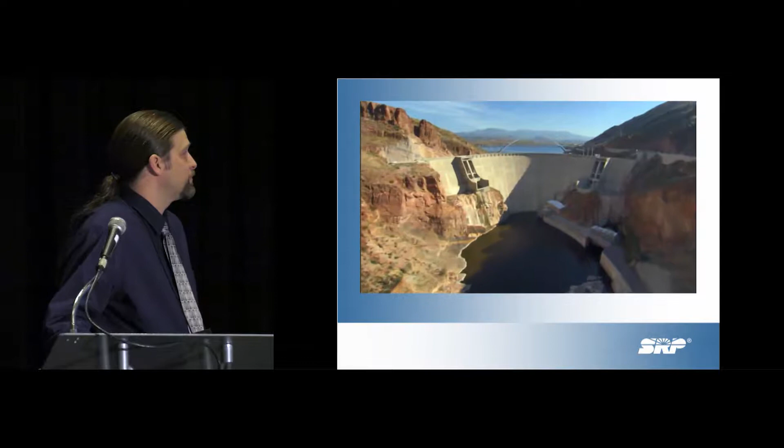Meeting the needs of our electric customers and water shareholders is always the right idea at SRP. For more than a century, we have been dedicated to providing reliable, reasonably priced water and power services to meet the needs of people, businesses, and communities in Arizona. As one of the nation's largest public power utilities, we provide generation, transmission, and distribution services to about 930,000 homes and businesses in our service area.

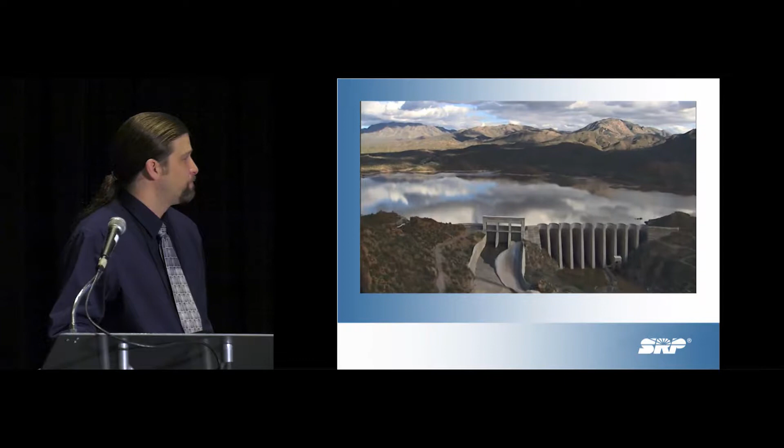We also are the largest water supplier in the Greater Phoenix metropolitan area, with a service area covering more than 375 square miles and management responsibilities for a 13,000 square mile watershed. SRP is a leader in the community, anticipating, planning, and implementing strategies that make the most of Arizona's precious resources, meeting the needs of our power customers and water shareholders now and in the future.

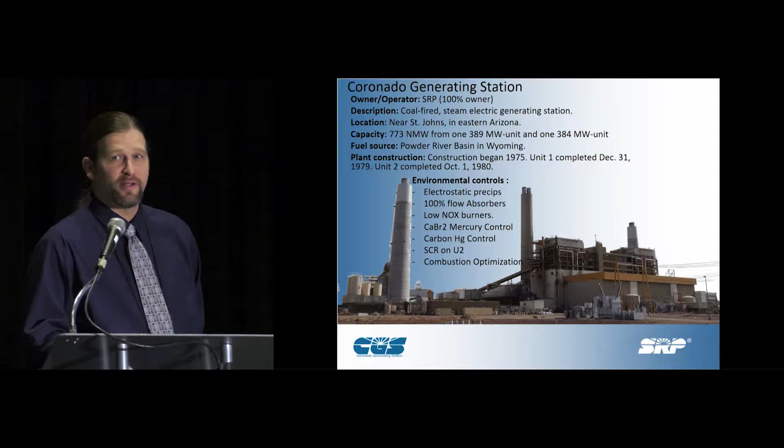All right, so that's who we are as a company. What we're going to talk about today is Coronado Generating Station, our operator training simulator, among other types of simulation. We're actually a coal-fired plant, and we've added on through the years probably every type of environmental control that's commercially available.

Historically, our control room operator training was just a 2-week classroom. We had 18 JPMs that were performed in the field. The unfortunate thing about that is you have a job performance measure, which is a good thing to do. However, those events didn't always happen, thankfully. So usually we did it with thought experiments and just talking through events. And then they had to be upgraded on the units for 80 hours before they were turned loose.

About 2009 is when we started working on the simulator. We actually had it installed by 2011. It was included as part of a DCS migration project. We went from a TDC 3000 to an IA system. We justified the simulator that way in that we knew we had several things happening. We were losing 90% of our workforce to retirements. Also, just having new controls pushed it forward.

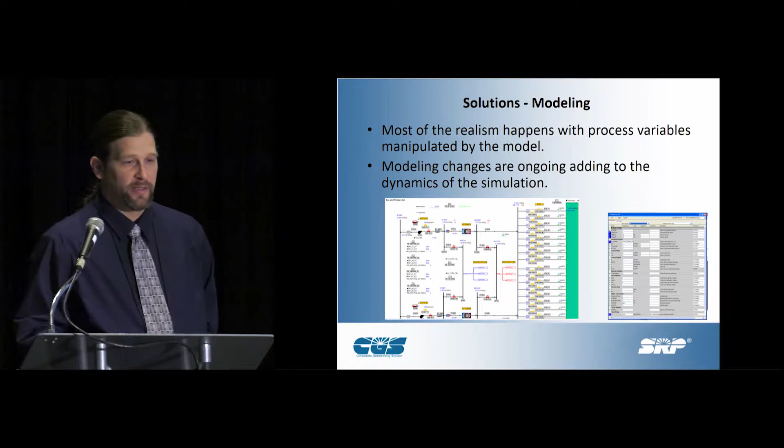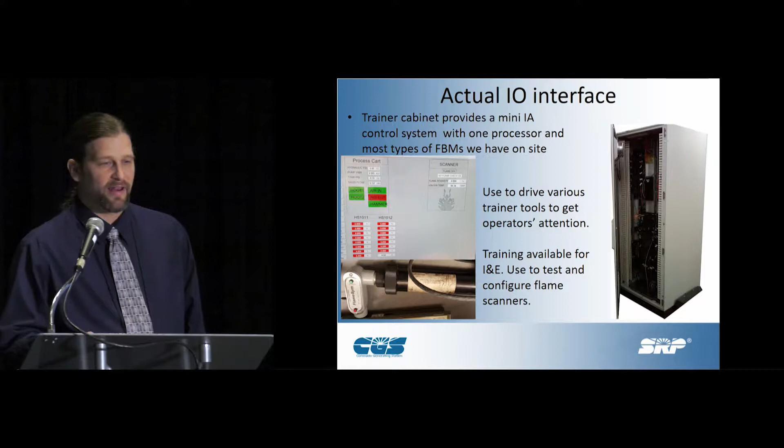So with simulation, as Rick mentioned, most of the realism happens with the process variables that are manipulated by a model, which is just a mathematical representation of the unit, of course done with a nice pretty little GUI. We added a little bit more to ours. We mimicked our control room environment, so it looks like a control room. Same type of console, same number of screens, everything. We also added an actual I/O interface so that we could do some maintenance training and configure our scanners, that kind of thing. Also, just to have fun with.

The thing that I started recognizing as newer and younger people started coming in and training was that they started treating it like a video game. And it is kind of like a video game. At the core of it, it's the same technology. So I needed a way to basically scare the hell out of them and make them take it seriously.

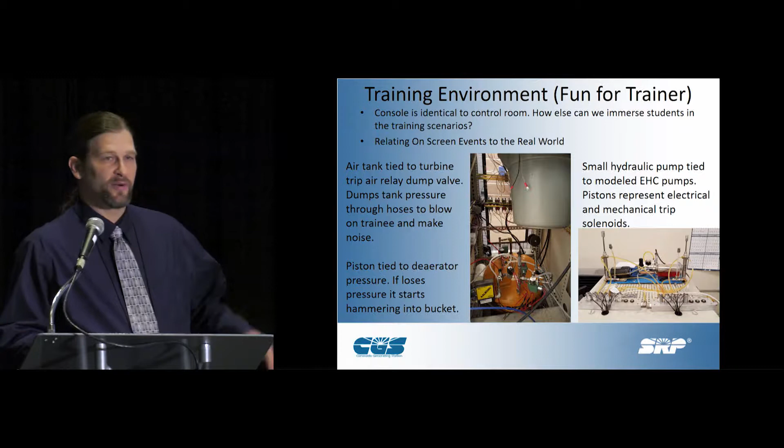So this was just a fun little project that we did, a little air tank that ties in. If they trip the unit, the air releases. Also, if they get into issues like with our deaerator and lose pressure, it'll slam that little piston into that bucket, and it's just fun and fireworks.

So during our migration, we did 4 days of training for existing supervisors and operations specialists. Our claim to fame there was we had no startup delays due to operator error and no startup delays due to DCS logic, which was our side benefit. We found multiple control issues that we thought were found during the FAT, where when we actually connected them to a high fidelity model, we found that we weren't nearly as robust as we thought we were. We found upwards of 200 control errors that would have bit us had we not done it.

Currently, our OST training program, that's Operations Specialist Trainee is what it stands for, people trained to be control room operators. We have a 120-hour Operations Specialist school. We actually do it with the simulator, so we do a little bit of classroom, and then we actually have them demonstrate on the simulation. The CBTs that we have them do during the training just kind of keep us on track. And it's a 6-week program.

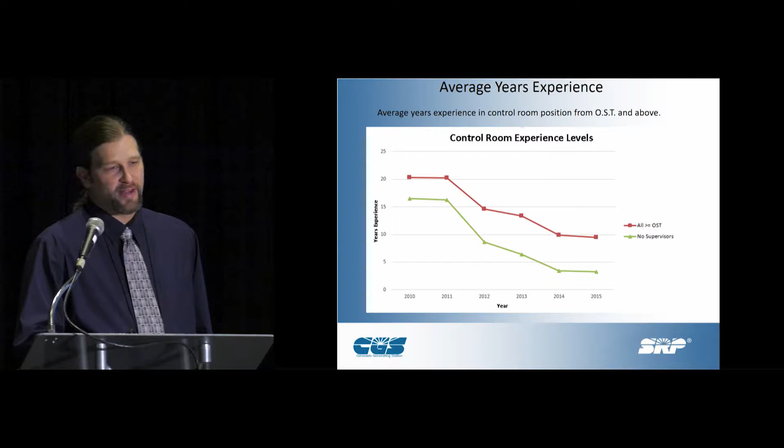So this is what we were facing, and this is actually information from 2015. It's gotten worse since. Our average years of experience in the control room went very quickly from about 16 to 18 years down to, currently, this actually went down even further. This is from last year. We're down under 2 years of average experience in our control room currently.

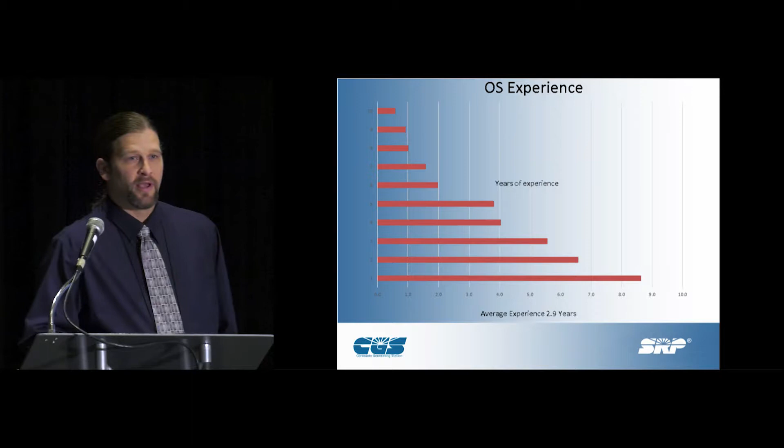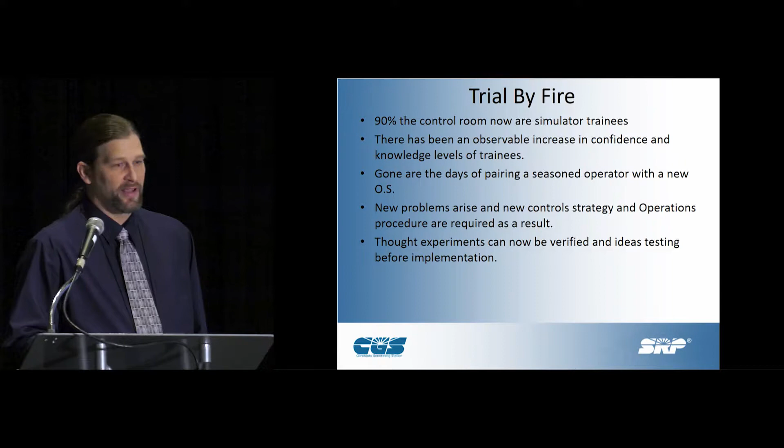So that's a trial by fire, right? So this simulation is going to work. We're going to be able to train these guys on how to drive these units, or we're going to fail spectacularly. Luckily for us, now 90% of our control room did actually come through the simulation program. There has been an observable increase in knowledge and confidence compared to previous trainees and what we're seeing today.

It always was in the past that we could take a new operator, pair them with a seasoned operator, so they could lean on him and he could teach them as events or excursions came up. Those days are gone. We don't have those people anymore that can do that. Also, as the market changes and things in our industry are changing with our loading profiles, new problems start arising. So another thing we've seen from the simulation is finding ways to mitigate those problems.

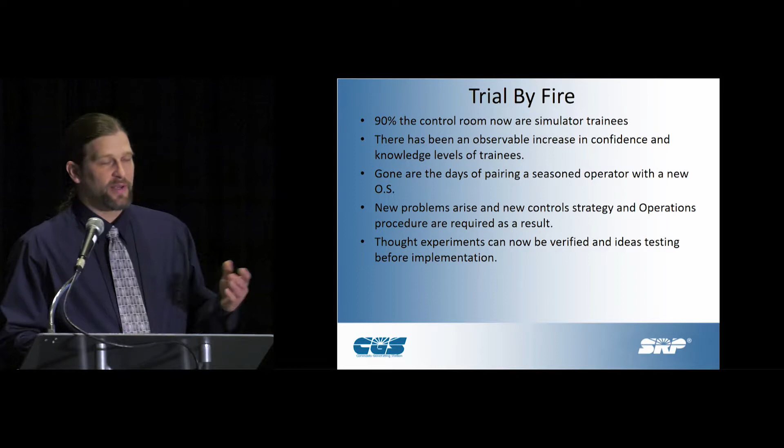And this is basically the fear that we were facing at the time. If you could play this.

Huh? Noise! Bad noise! 5 minutes before critical mass. Critical what? Okay, don't panic. Whatever problem this is, I'm sure they know how to handle it. Oh? It's my problem! We're doomed! Sector 7G is now being isolated. Mr. Burns, people are calling this a meltdown. Oh, meltdown. It's one of those annoying buzzwords. We prefer to call it an unrequested fission surplus. Homie, please be all right. Gotta think. Okay, somewhere there's a thingy that tells you how to work this stuff. The manual. The manual, right. It's as bad as a phone book. Congratulations on your purchase of a Fissionator 1952 slow fission reactor. Don't get to the point, man! Woo, what's this? Don't! Who'd have thought a nuclear reactor would be so complicated?

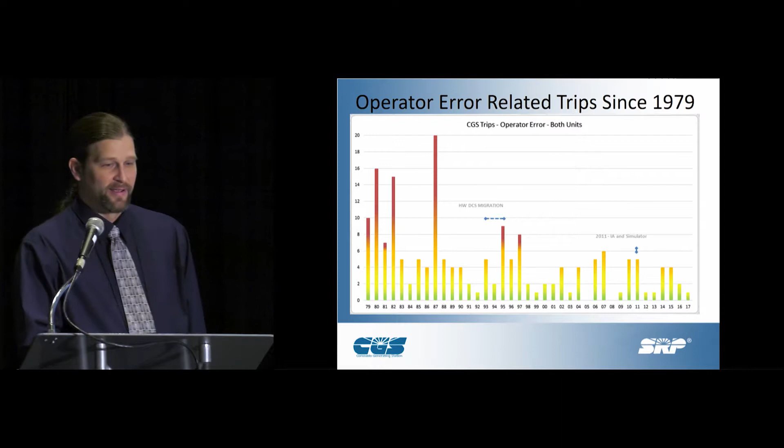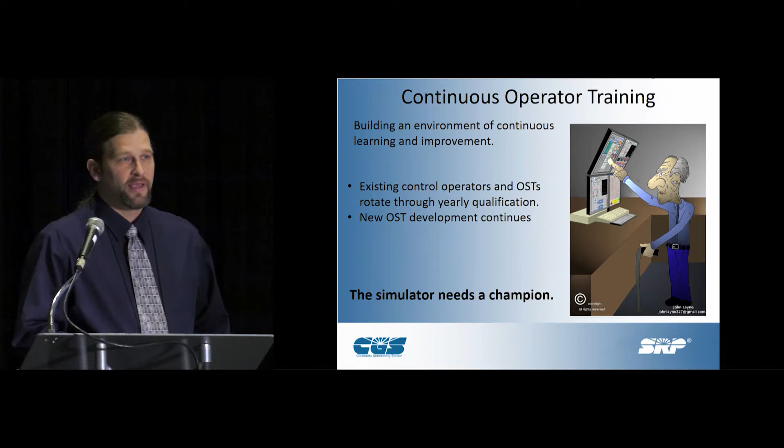So a lot of getting that is not only the initial training, it's also trying to build an environment where we have continuous training. So anything that happens on our units, any operator error, any process differences that we need to teach people on, we always rotate them through and test things on the simulation. It's always available 24/7, so an operator, when he's going into an unknown event or he knows something's coming up, can go back and test and try it on the simulator itself.

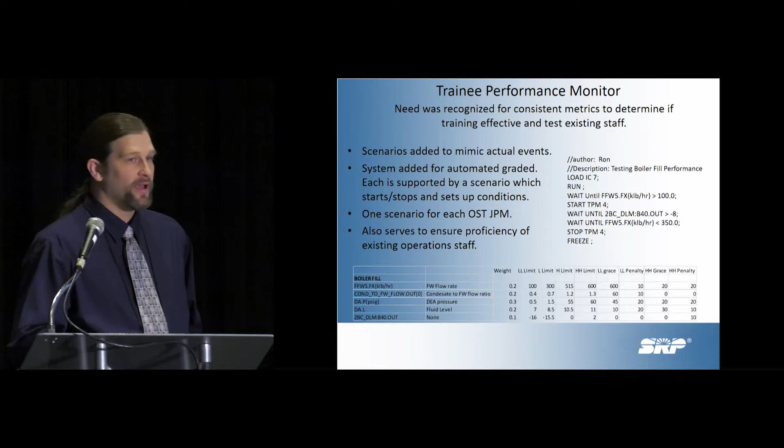Along with that, one thing that happened was a corporate goal. In the fossil industry, we're not required to vet our operators. They don't have to qualify. It's really up to us when we say that they're ready. But we wanted to do a little bit better and actually make our operators go through a yearly qualification.

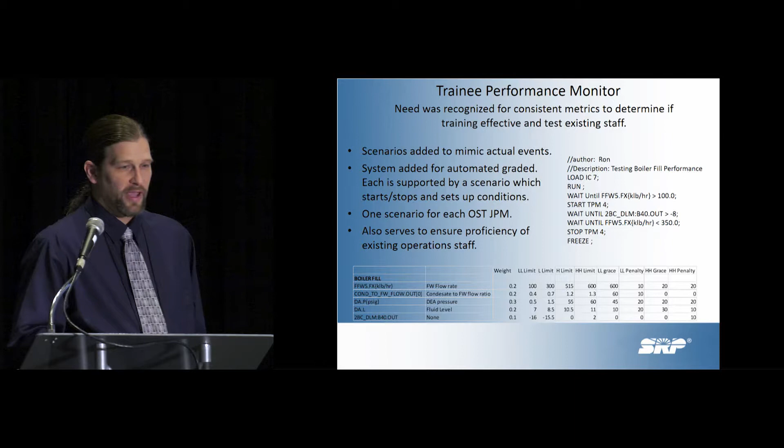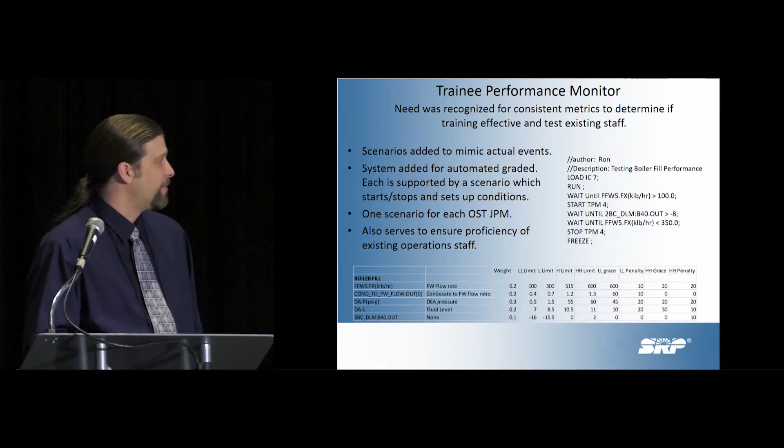And this is essentially how we did that, with a trainee performance monitor. This way it's empirical. It's not just up to the instructor. It's actually graded based on algorithms monitoring certain parameters.

So this is essentially what we do. We take them from a cold metal, from the very bottom, and have them work up. It works through 11 tests as they bring the unit up.

One of our big challenges when you're trying to build an automated grading system is there's so many different things that can happen when you're dealing with upwards of 12,000 I/O points. You don't want to make it so hard that nobody's going to pass, but you also don't want to make it so easy that they're just cruising through it.

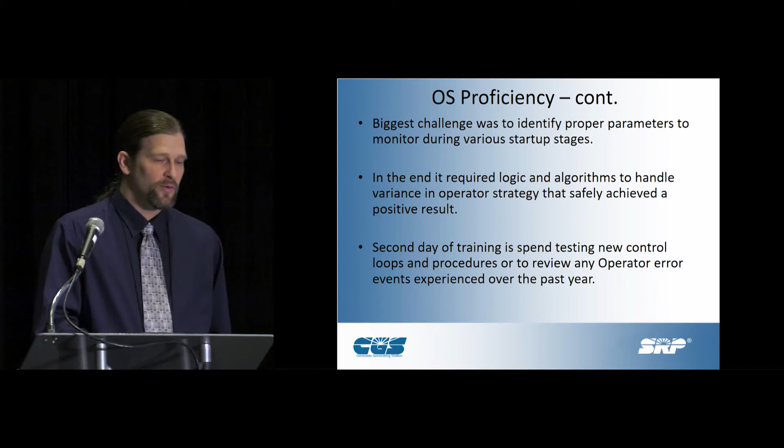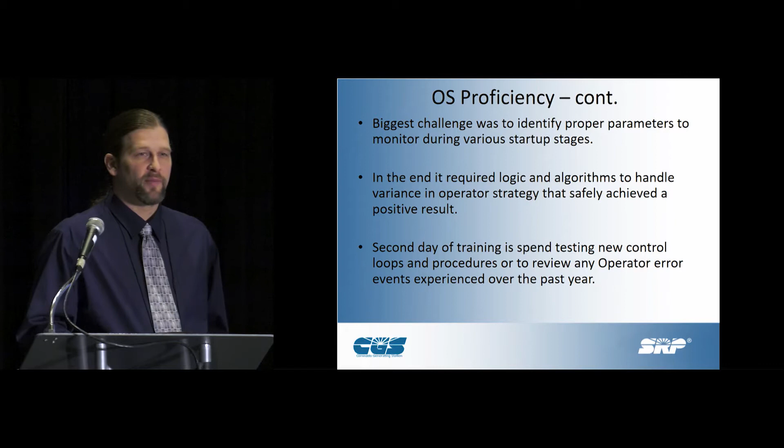So I thought this was interesting. I had to throw this in because being from a younger generation, I was always faced with, you're this young guy, you don't have all this experience, what could you know? So one of the interesting things, as we started going through yearly qualifiers, I found that experience did not mean that people were going to do better on grading. And it's not just because they're sitting in front of a computer and they're not used to it. Experience actually isn't everything in this.

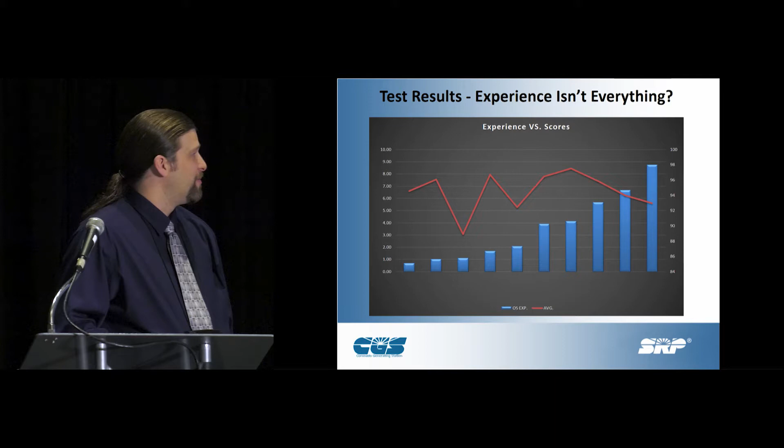A lot of it is the quality of training, obviously, but also how much the person takes it seriously and how much they're willing to learn. So we've got years of experience on a bar there. The red is actually the average scores, and they start tailing off towards the end. Now, to be fair, some of the older guys are not as nervous about it as others because they know we're not going to kick them out if they don't do great on the tests.

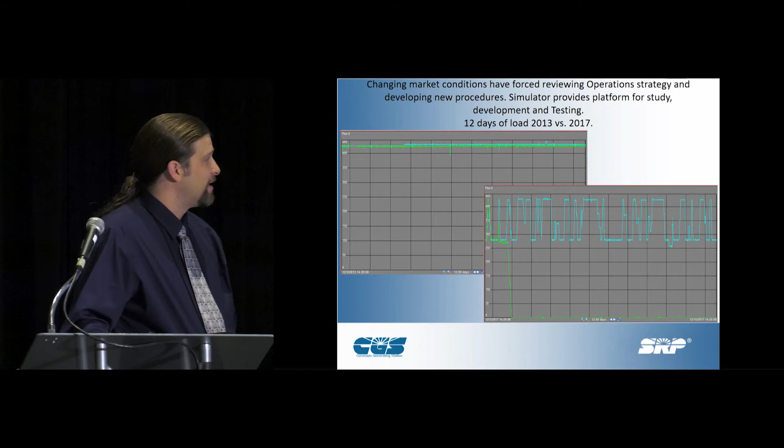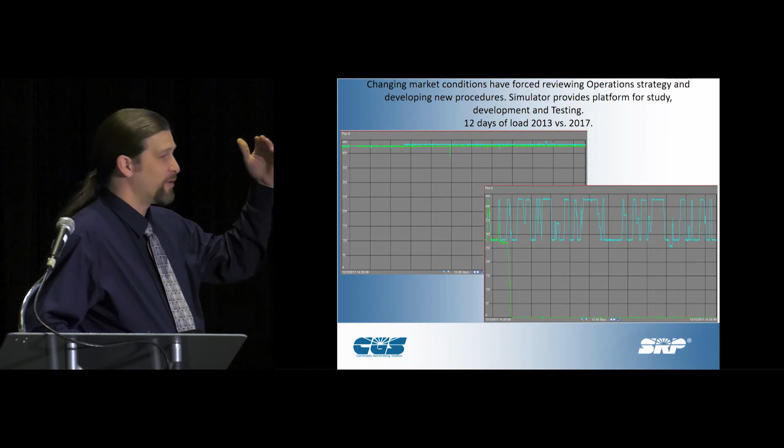Something that's happened very recently, a new challenge that we're facing, is something the simulation has really been paying dividends for us. These are our load profiles. We have 2 units there. So this is 12 days of load, 2013 versus 2017. 2013 is 12 days in December. That trend on the top, we were base loaded constantly.

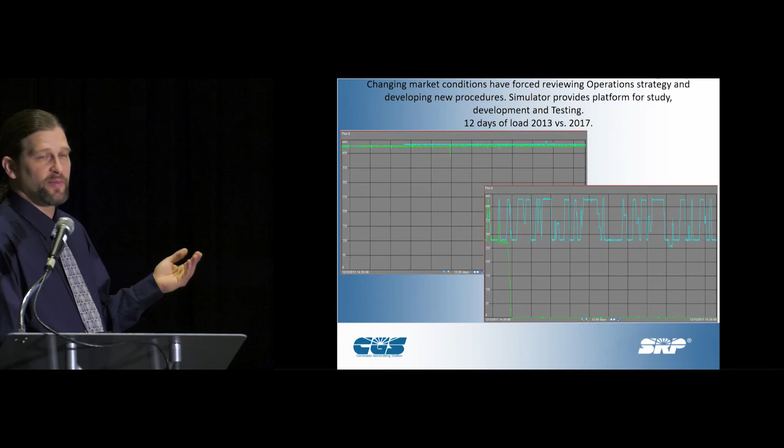So basically we would bring these units up, take them to as much load as we could possibly produce, and then just tune and try to make them as efficient as possible. Those days are completely gone for us at this point. Even in the summer when our loads are highest, our load profile looks more like that bottom trend. What you're seeing there is one unit coming offline and the other unit swinging from almost our minimum up to base load, sometimes several times a day. This opens up a whole new world of challenges that we're not used to, with thermal cycling, and things start breaking.

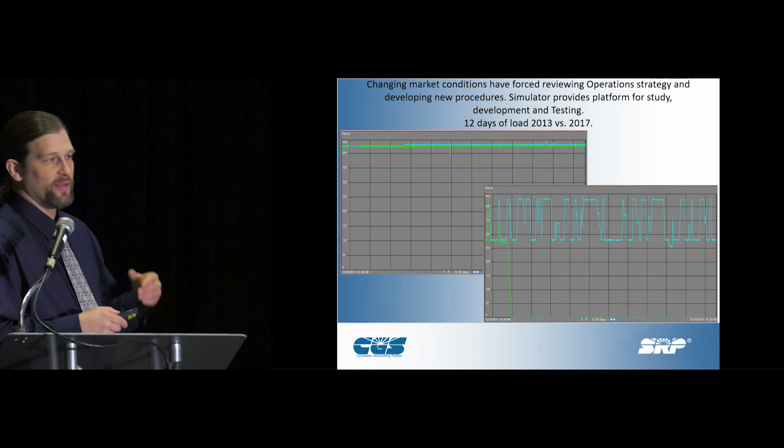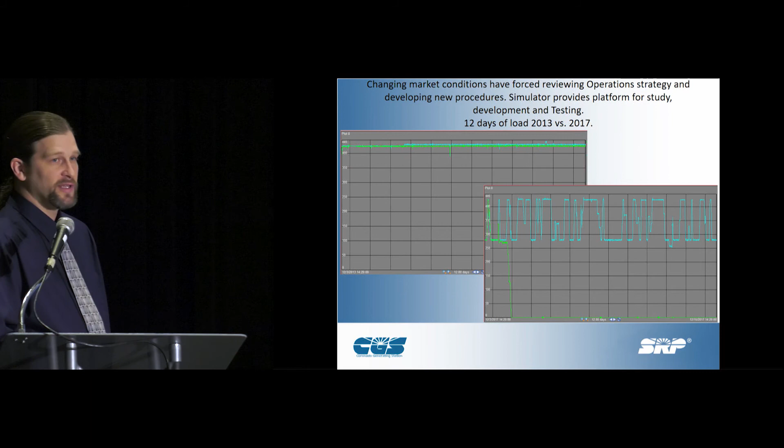It's also changed how we operate. We had to come up with new procedures for almost everything that we do on a daily basis. And that's where the simulation really has worked out for us, because we can practice over and over again. And the robustness of our models is close enough that we can actually see those things happen in the real world after we test them on the simulation.

Going into the future, it's all about just trying to get better. Mostly, we're changing the grading algorithms, trying to make those more proficient so that we're testing operators on more actual events that they're seeing. Also improving the models to do more with engineering studies and heat rate analysis and those sorts of things.

Another thing that's happening is more of our sites continue to add simulation systems. So we've started looking into, and done a few tests with, group training on a corporate-wide scale. That way we can include dispatch and actual frequency excursions and those sorts of things that we see on the grid. That's all I've got.